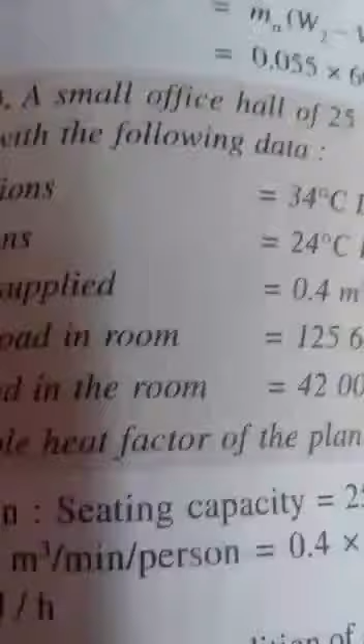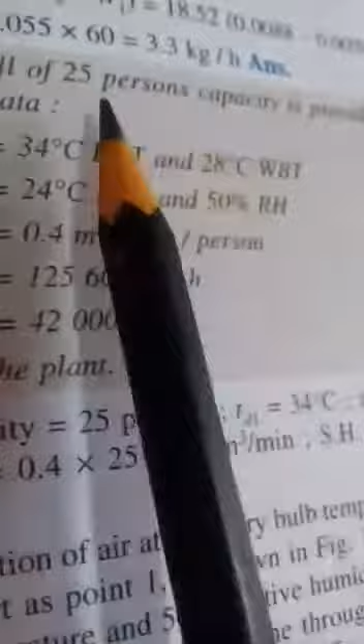So now I'm going to tell about one numerical. Going to a small office hall of 25 persons capacity is provided with summer air conditioning system with the following data.

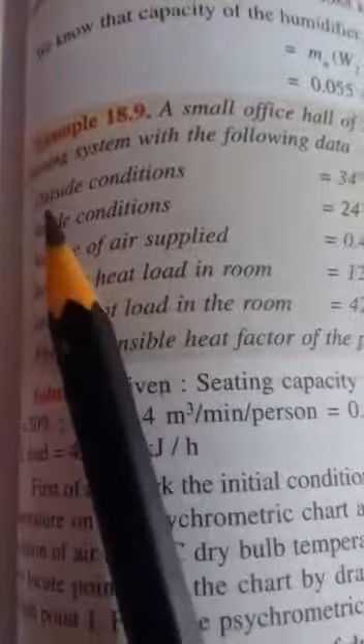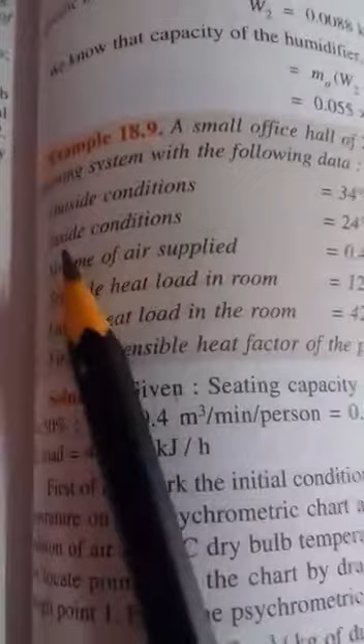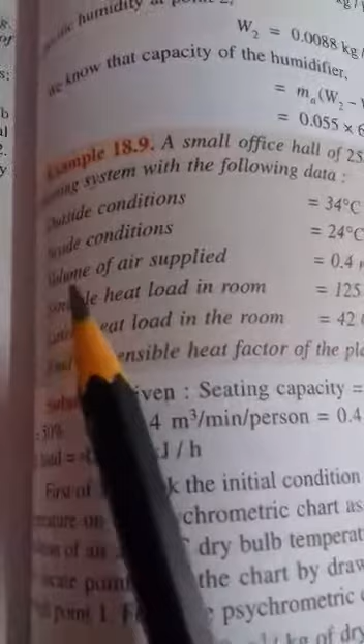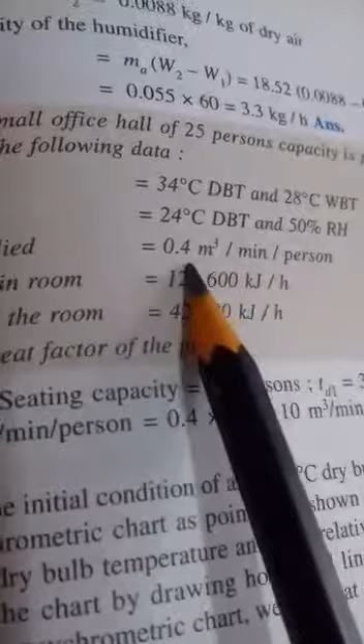Phir kya diya hai? Volume of the air supplied, that is 0.4 meter cube per minute per person. Mind it, per minute per person. The volume of the air per 0.4 meter cube per minute per person, and there are 25 persons, so it will be directly multiplied with the 0.4.

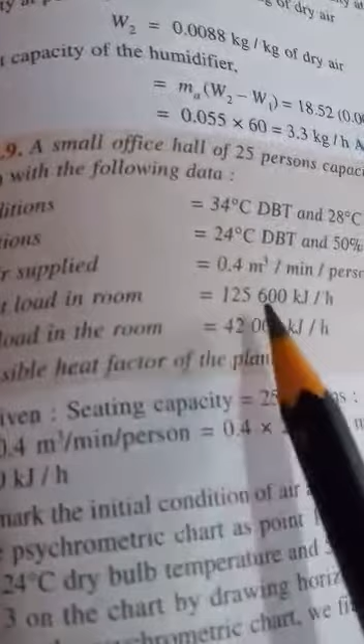Next, sensible heat load in the room 125,600 kilojoule per hour - sensible heat load de diya. Then latent heat load 42,000 kilojoule per hour. Ye dono load humko inhone de diya.

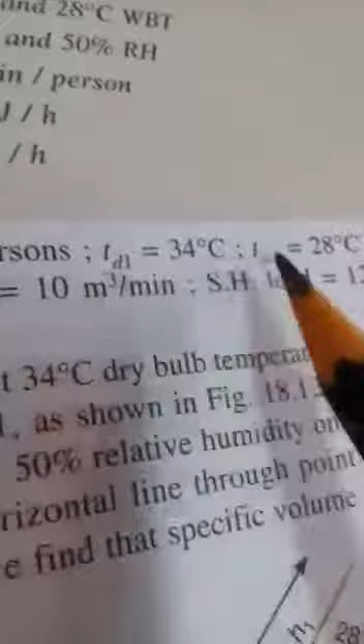V1, that is the volume of the air per meter cube per minute per person, 0.4. There are 25 persons, so multiply it by 0.4, we get 10 meter cube per minute.

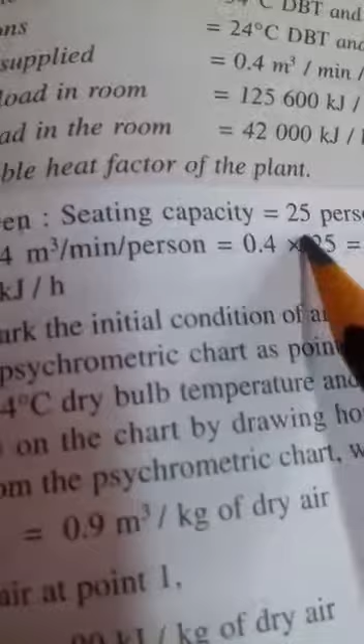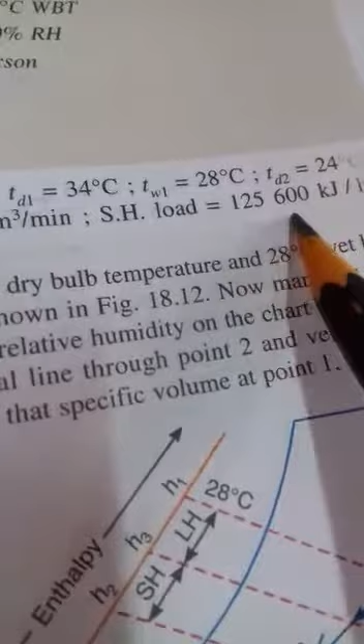Sensible heat load, it is given 125,600 kilojoule per hour. Mind it, per hour it is given. Then latent heat load 42,000 kilojoule per hour. So we have got the sensible heat load also.

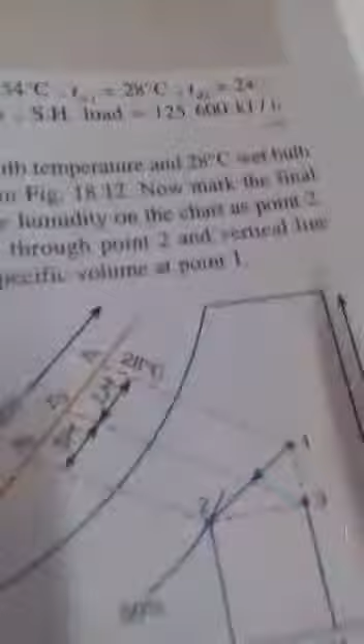Now we will go on the psychrometric chart. First of all, mark the initial point 34 degree dry bulb temperature and 28 degree wet bulb temperature. On psychrometric chart, point number 1, that is your dry bulb temperature 34 degree and WBT wet bulb temperature 28 degree. Okay, so we have marked point 1.

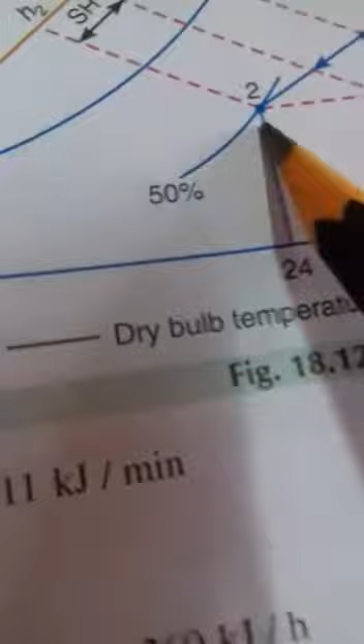Next comes point 2. Mark the final condition of the air, 24 degree dry bulb temperature and 50% RH on the chart as point 2. You come to chart, point 2 is here, 1 was there, 2 is here, then 2 is at 24 degree DBT dry bulb temperature because it is on the x-axis, so it is dry bulb temperature.

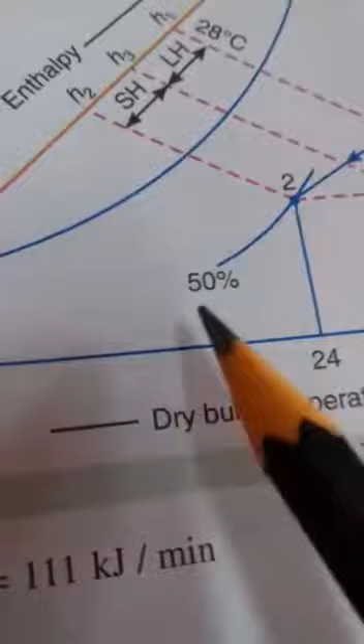And then that is given 50% RH, that is relative humidity line, 100% RH, and here it goes on reducing. A 50% RH line is this one. So we have located two points, point 1 and point 2.

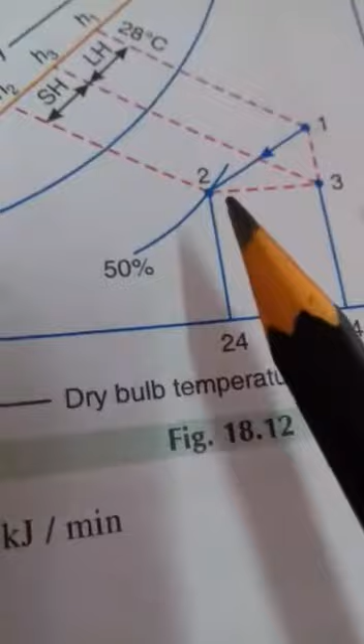It has been located. Now we can draw a horizontal line from 2 and a vertical line from 1. Both the lines will cut at point 3. In the psychrometric chart you see properly, from point 2 we have drawn a horizontal line that is parallel to the DBT and one vertical line that is parallel to the specific humidity. Both of them are cutting at point number 3.

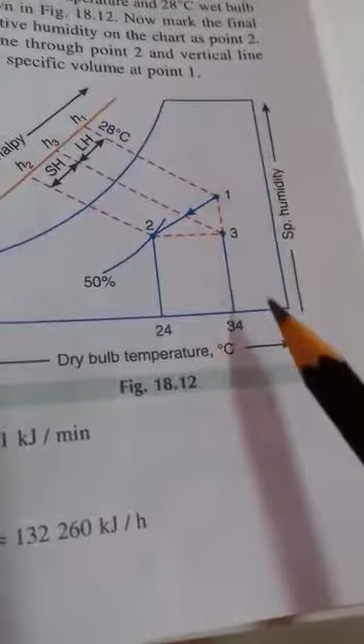Now we see that VS1 means specific volume at point 1. That from the chart we can find out. There is a line for the specific volume in the chart. It is not mentioned, given over here, but that specific volume comes out from the chart is 0.9 meter cube per kg of dry air, VS1.

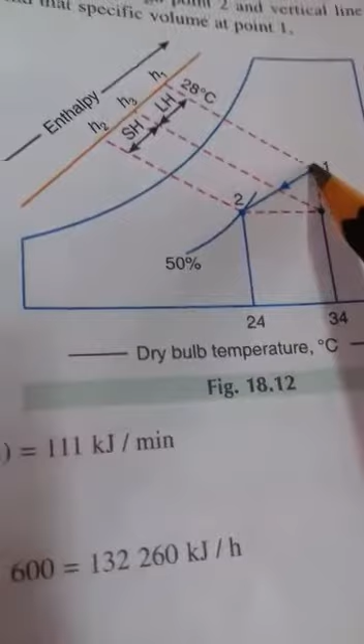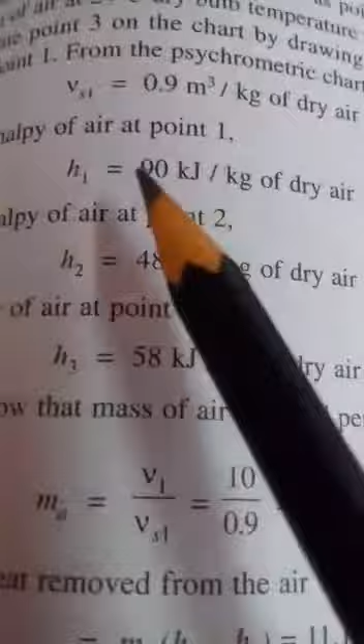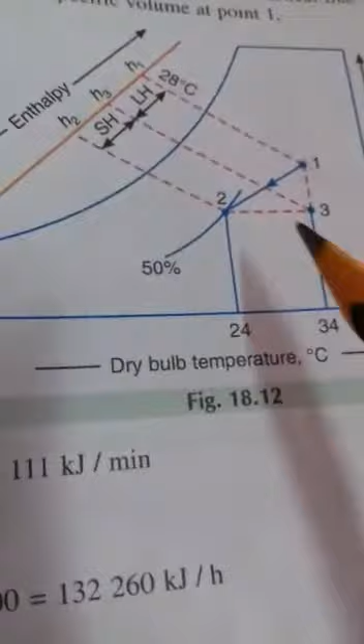Now enthalpy, we can find out all the enthalpies. Enthalpy at point 1, that is H1. Enthalpy at point 2, that is H2. Enthalpy at point 3, that is H3. So all the enthalpies are available from the chart, we can get all the values. So in that way they have written over there enthalpy of air at point 1 H1, enthalpy of air at point 2 H2 and enthalpy of air at point 3 H3.

So all the enthalpies have been found out from the chart. Now we know that the mass of the air supplied per minute.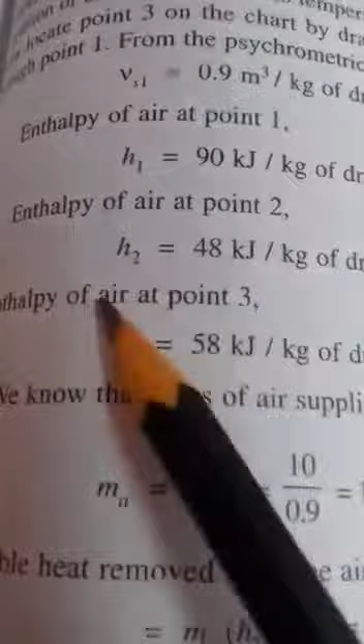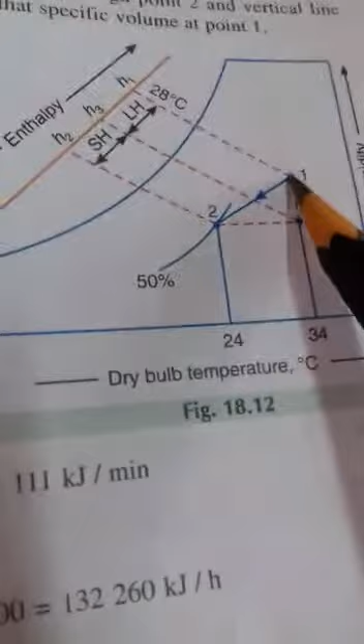Air is supplied at condition point 1. We know the specific volume, and in the question it is given that volume of air supplied is 0.4 meter cube per minute per person. We have multiplied it with 25 persons, so 0.4 into 25, that is 10 meter cube per minute.

So from here mass can be written as V1, that is 10 meter cube per minute which we have calculated, divided by Vs1, the specific volume given in the question. So mass comes out to be 11.1 kg per minute.

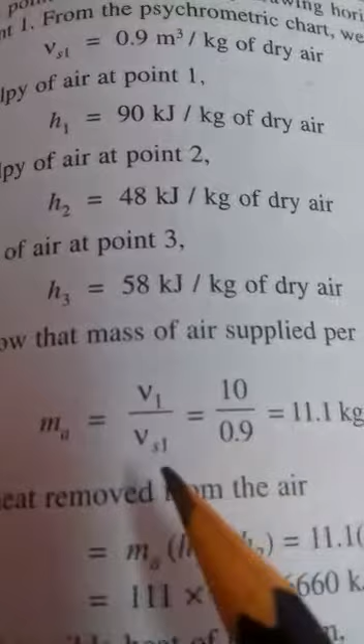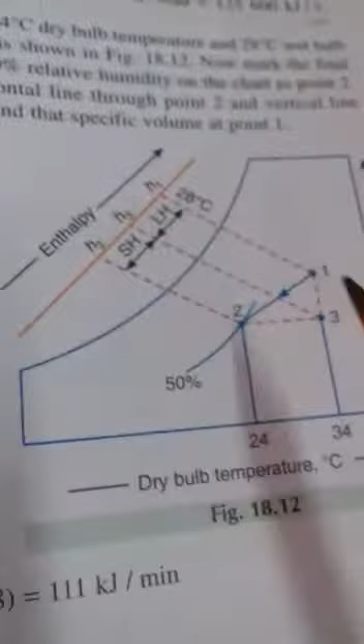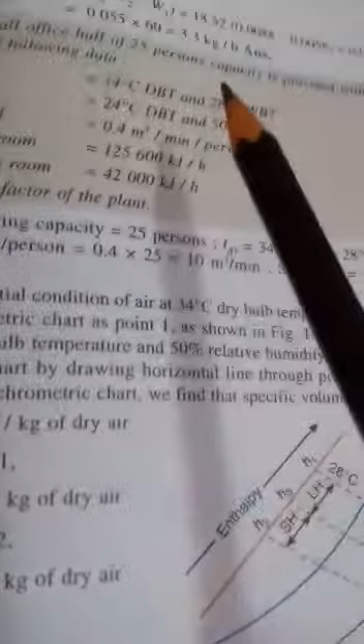I think it is clear, because point 1 is the outside air condition, and air entering inside is 0.4 meter cube per minute per person, and number of persons are 25. We multiplied 0.4 with 25 to get the total number of persons involved in the air conditioned room. So we get Ma, that is V1 upon Vs1, that is the value we got.

Now, sensible heat, how much will be the sensible heat removed from the air? That is Ma into h3 minus h2.

Sensible heat is on the x-axis, parallel to the x-axis. h3 minus h2, that is the change in enthalpy which we have got from the psychrometric chart, and that is Ma into h3 minus h2.

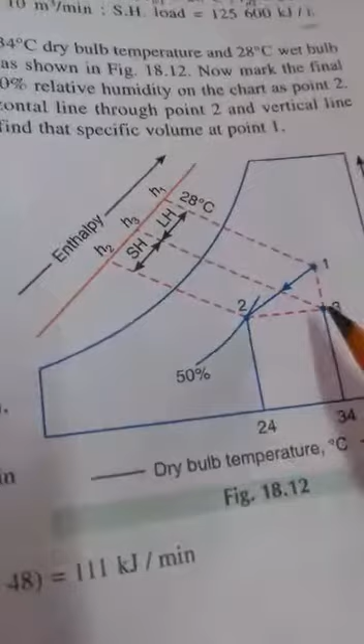11.1 we have calculated, every factor is known, it comes out to be 111 kJ per minute, and since this is per minute, if we want it per hour we have to multiply it by 60 to get kJ per hour.

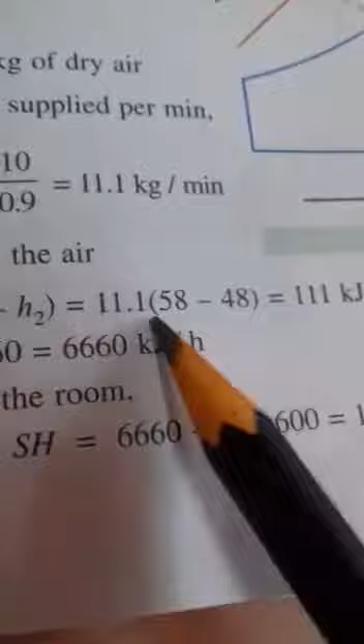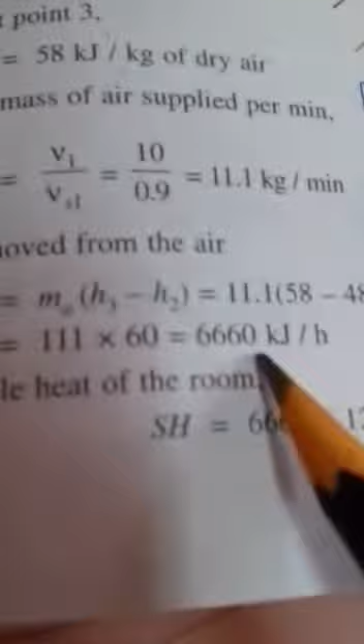Similarly, total sensible heat of the room will be what we calculated, and it is also given in the question. So we have to add both, and we get the total sensible heat.

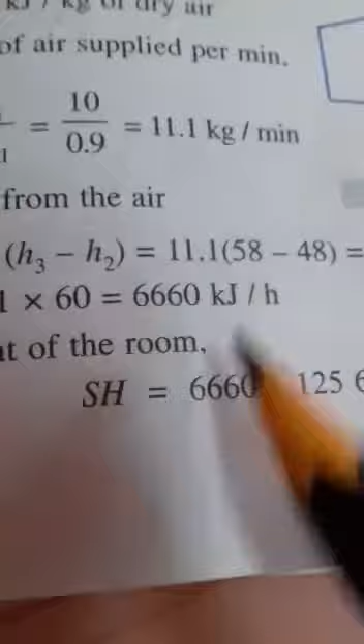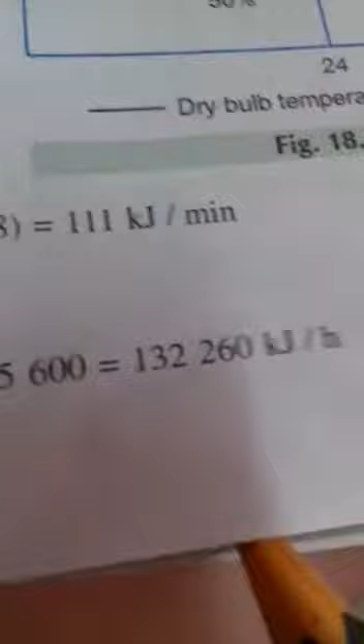Now we know that the latent heat removed from the air is Ma into H1 minus H3, that is the vertical line on the psychrometric chart, parallel to specific volume, specific humidity.

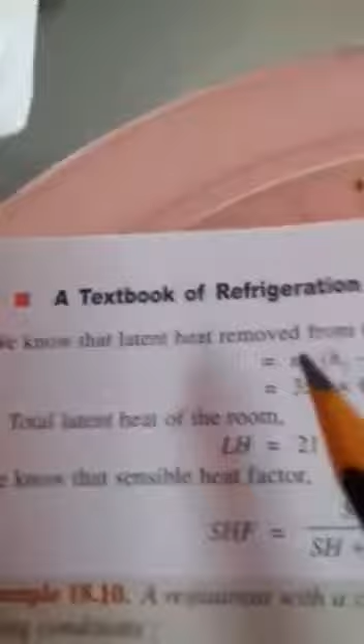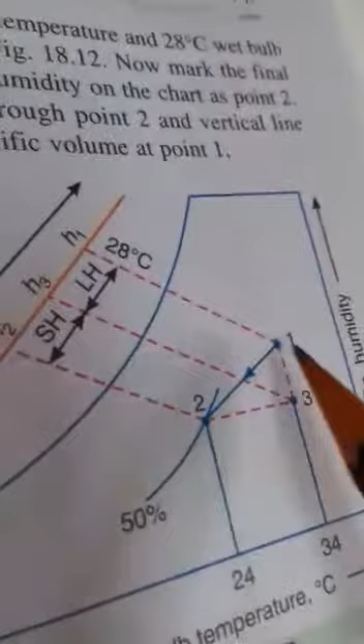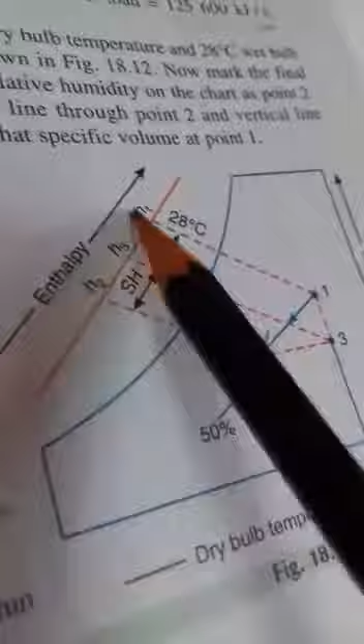H1 we know, H3 we know from the chart. So putting all those values, latent heat equals Ma into H1 minus H3, that is 11.1 into 90 minus 58. H1 we know, H3 we know, we get the value 355 kilojoule per minute.

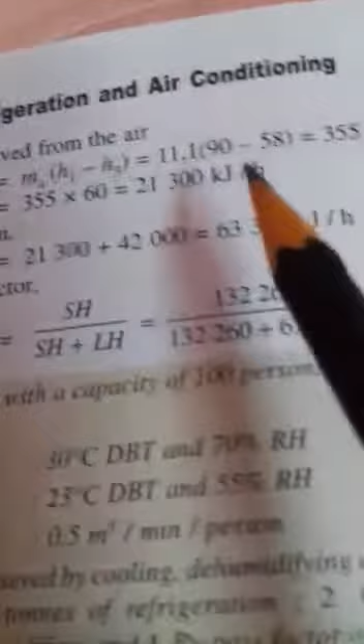Again we have to check kilojoule per hour, because in the question the given latent heat is per hour. So multiplied with 60, we get 21,300 kilojoule per hour, that is the calculated latent heat.

Now in the question it is also given the latent heat of the system, so we have to add both latent heats together. We get 21,300 plus 42,000, total latent heat comes out in kJ per hour.

Mind it, we have calculated in kJ per minute, but we have to change it into kJ per hour. So now we have to find out latent heat, we know, sensible heat we know.

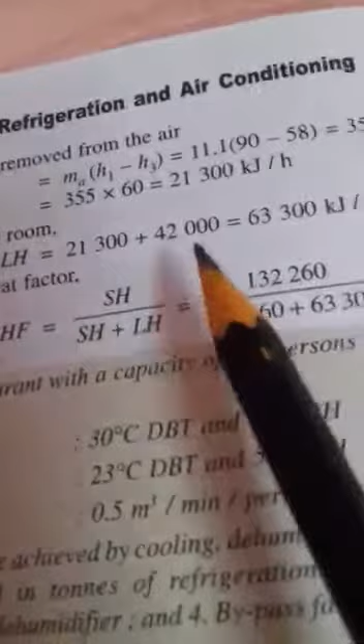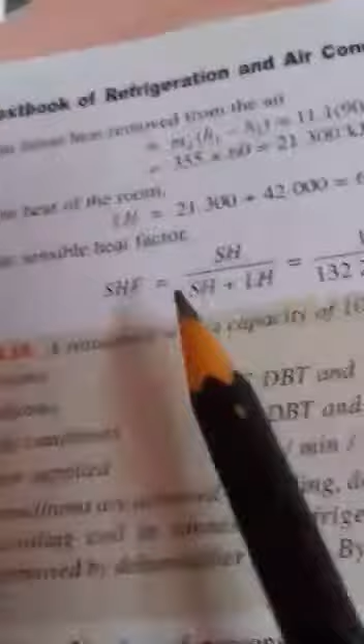Now we know that sensible heat factor is given by sensible heat divided by sensible heat plus latent heat, or we can say sensible heat upon total heat. Putting all those values, 132 260 divided by 132 260 plus 63 300, we get the value 0.676. So we have to find out the sensible heat, we have found it out.